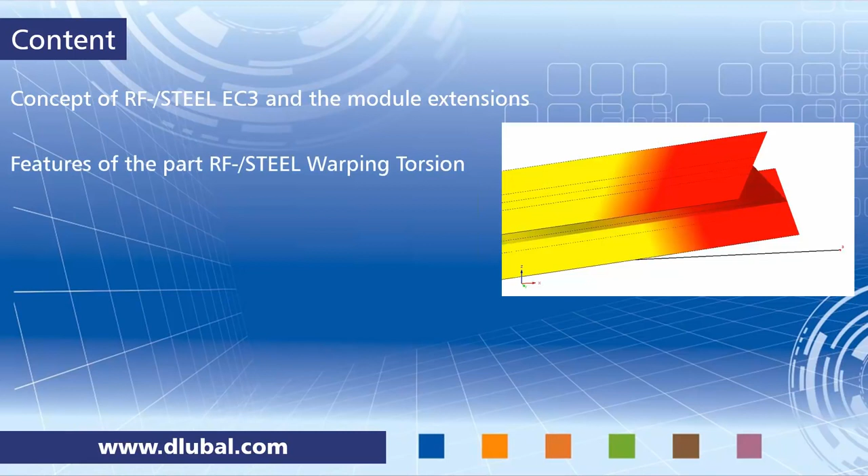We get started with the concept of the RF-STEEL EC3 module and its module extensions. I will then summarize a few features of the RF-STEEL Warping Torsion add-on module and the RF-STEEL Plasticity module. Then it's time for me to hand over the screen to Wieland, and he will show you an example in RSTAB, and he will perform stability design checks using the second-order analysis and employing 7 degrees of freedom. He will also perform a plastic design in RF-STEEL Plasticity.

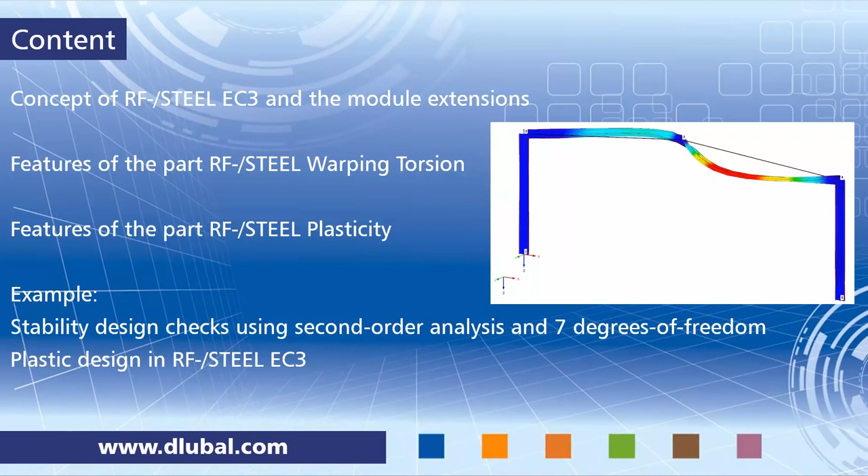Okay, let's get started with the concept. We have the add-on module RF-STEEL Eurocode 3, RF-STEEL EC3. Here you can design in accordance with Eurocode 3. You can perform stability design checks. You can do deformation analysis, and of course you can also do some fire protection analysis.

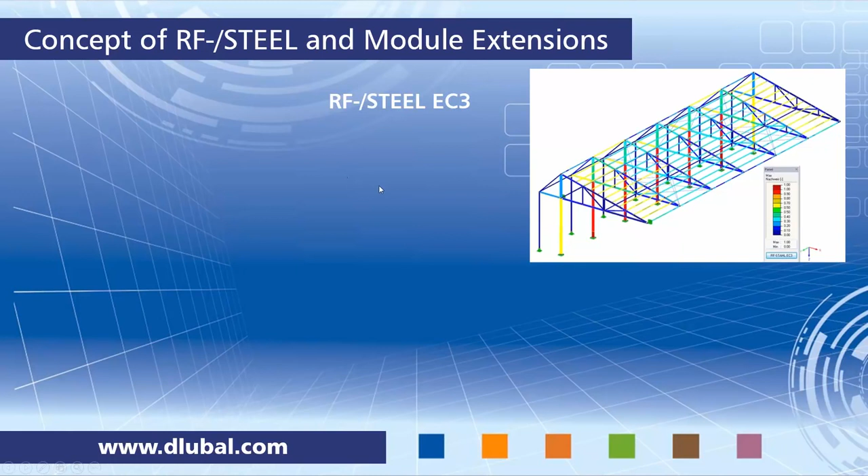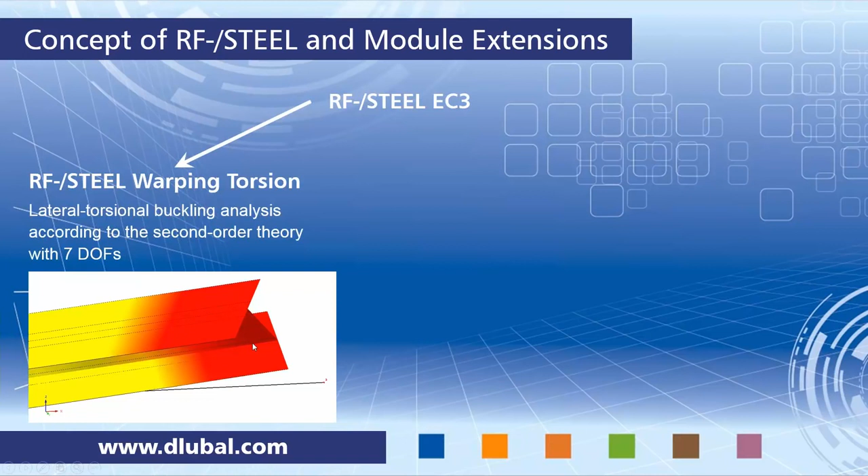And together with this add-on module, you can enable 2 different extensions, and one is RF-STEEL Warping Torsion. Here you perform a design with the second-order analysis under consideration of a 7th degree of freedom. That's warping torsion. And a second extension is RF-STEEL Plasticity. Here you can perform a plastic design of cross-sections. They both work either independently or you can use them in combination. And Wieland will show you this throughout the example.

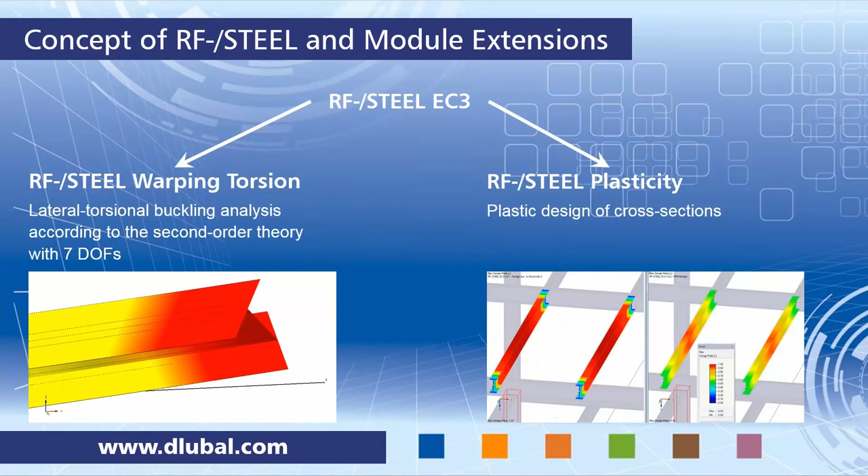To give you a bit more detail, here's a list of features of the Warping Torsion extension. So you have a standalone solver, and this is considering 7 degrees of freedom. So the 7th degree is the warping torsion degree of freedom, beside the usual translational and rotational degrees of freedom. And it is performing a nonlinear analysis in accordance with second order. You can enter imperfections, and in general this extension is available for thin-walled steel cross-sections.

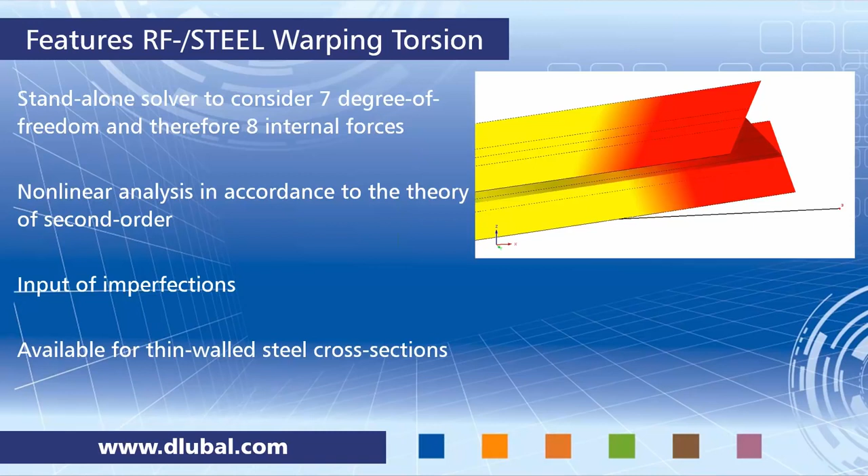In RF-STEEL Plasticity, we have different methods of analysis available. The main one is the partial internal forces method by Kindmann and Frickel, and this method is suitable for nearly all types of cross-sections. This method exists with and without a redistribution of internal forces, and a second method that is available is the simplex method. This is for general cross-sections, and another type is the analytical nonlinear optimization procedure, which is used for elliptical cross-sections.

So it's now time already to hand the screen over to Wieland. He will show you all the discussed things live in RSTAB. And just a side note, everything that is shown and discussed today is available in RSTAB and RFEM. So the add-on modules shown today are available for both program families. So now I hand the screen over and enjoy the webinar.

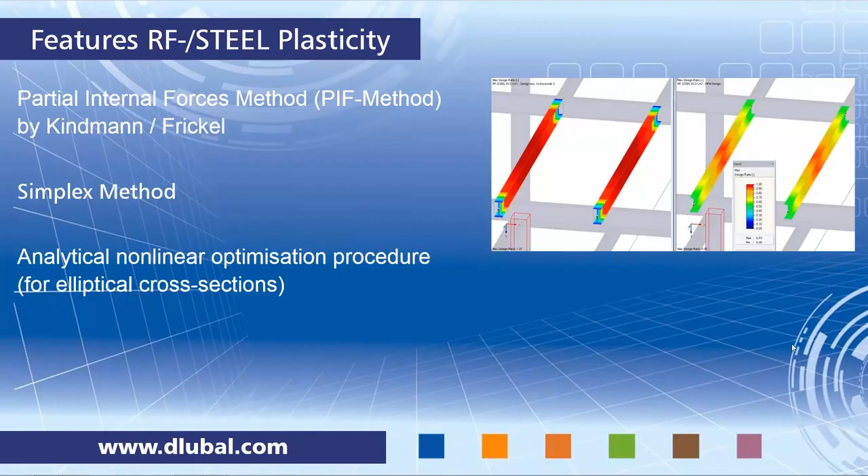Now it's time for the live presentation of this webinar, and I have already prepared the model to start with the STEEL EC3 design. So you can see we have a very simple frame with a vertical and horizontal loading, just one load case. And I want to take a look at the horizontal beams, which we want to design as a set of members. So there's not just one single beam, it is divided by one node, so I had to prepare a set of members to use it as one element in the STEEL EC3 design.

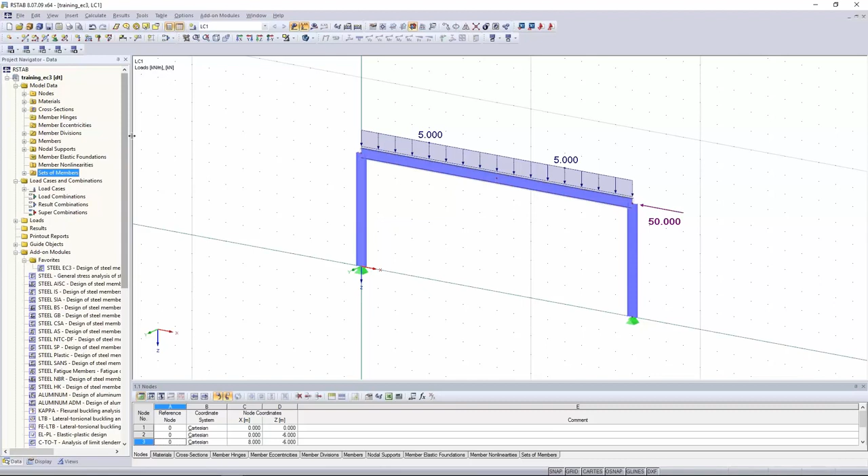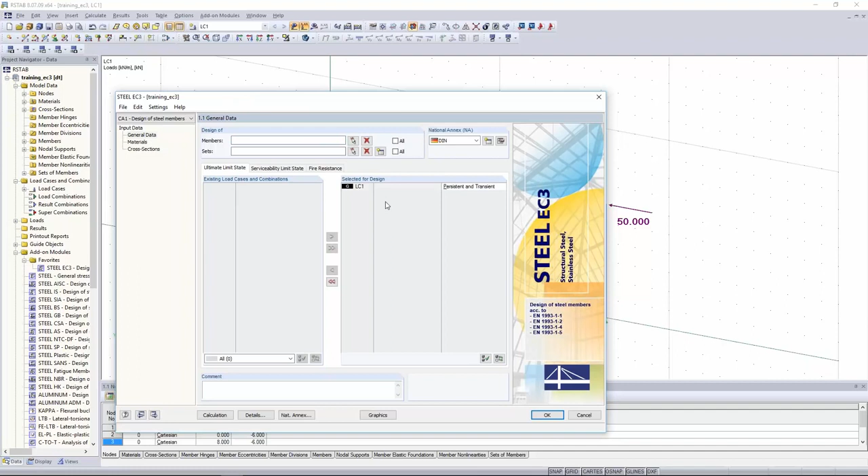Because some of you might see this module EC3 for the first time, we're going to start with just a basic design according to Eurocode 3, and then we want to do an upgrade to warping torsion and plasticity later in this presentation. Yeah, so I've opened the module STEEL EC3. I have to select the load case which I want to design, which is the only one, LC1. I want to check my set of members, and today we want to design according to the Eurocode 3.

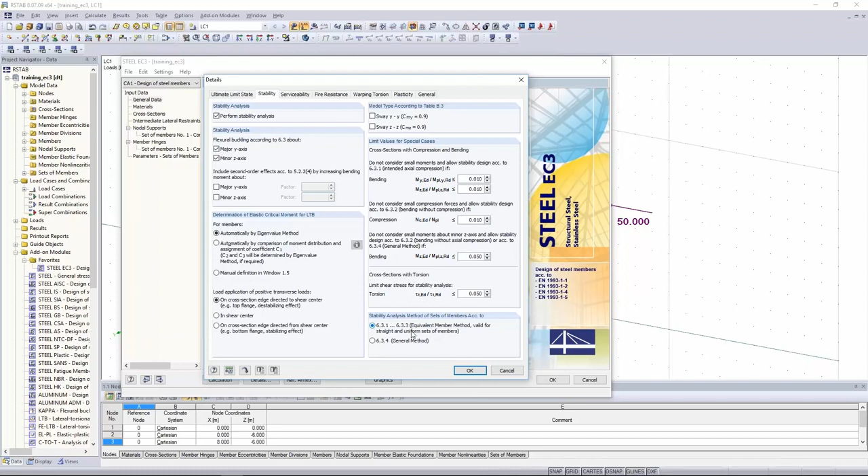In the first part of this design, I want to check this set of members not according to the general method. I want to design it according to the equivalent member method, which I can change in the stability dialog of details. Then I can continue to the next mask to check the material again, which is S235. This is fine. Cross-section is IPE 500.

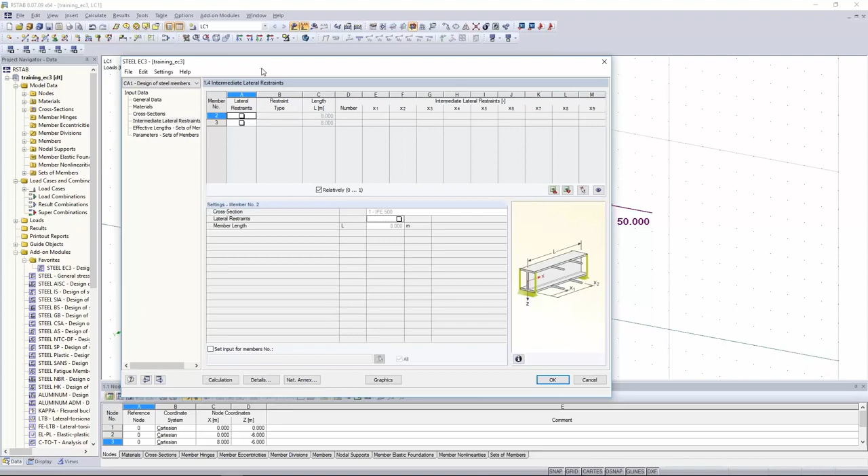I have no intermediate restraints on this horizontal beam, so I can skip this mask. Otherwise, you can prepare intermediate supports along this beam as you wish.

In the next mask, which is effective lengths, you can define all the settings for buckling about y-axis, buckling about z-axis, and lateral torsional buckling in these columns. We want to keep it simple and design it as a simple fork-supported set of members. So all of these settings are already fine. We have buckling length factors of 1.0 in both directions, and the beam is simply fork supported.

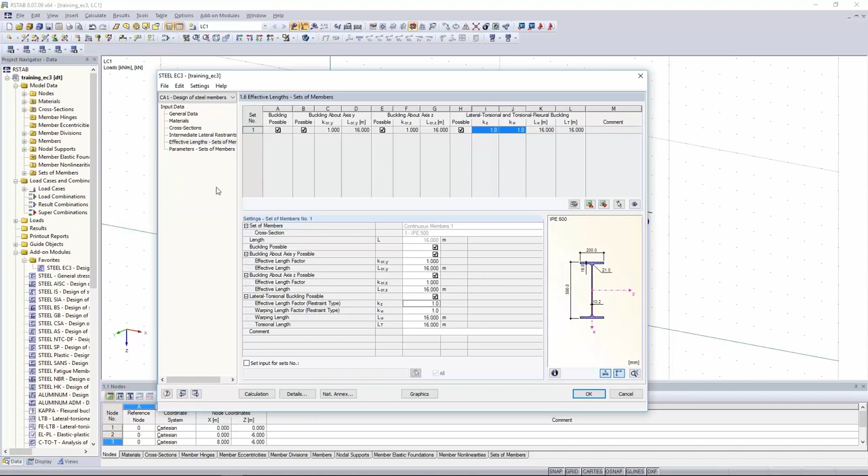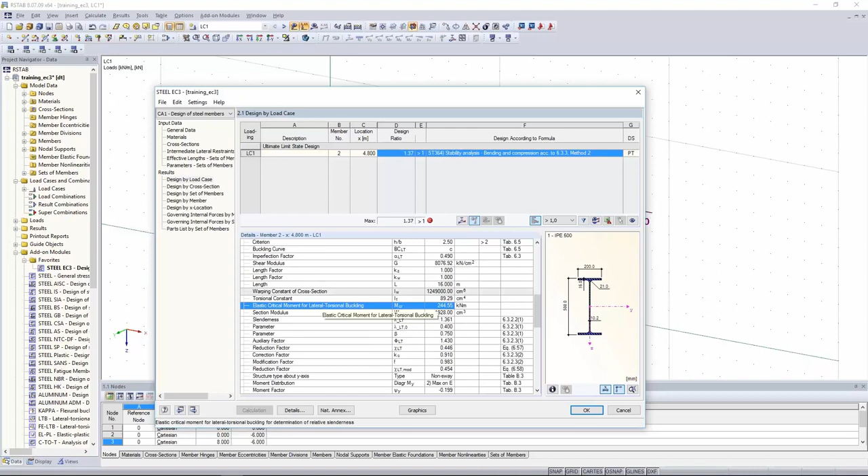So now I can just run the calculation, and you will see we have an overloaded horizontal beam, horizontal set of members here. We have a cross-section class 3, and you can check all the partial results in the design table on the bottom. So you have a part of the cross-section classification. You can see the critical buckling loads over there, and you can check almost every intermediate result in this table. You can export it, and also you can take a look in the graphic to check the results.

So there we have a class 3 section. I think this is at the x place where there's no bending moment. Yes, so we have only compression force, and that's why the IPE section is classified as class 3.

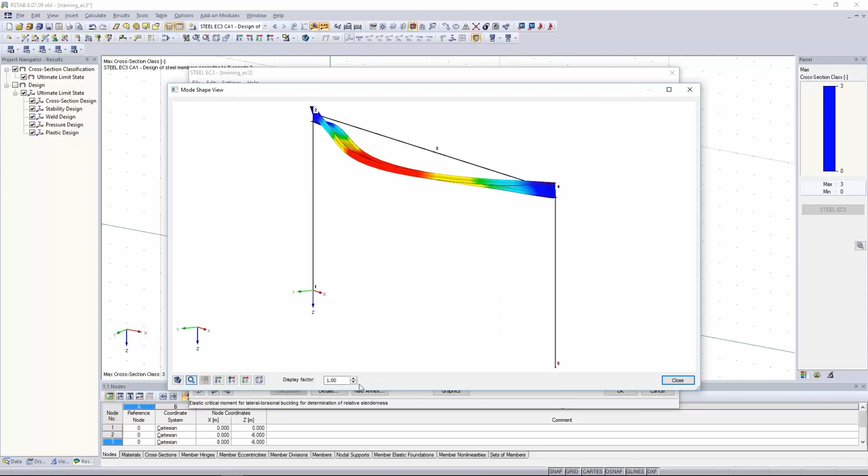Let's get back to the design module. If you want to check the eigenvalue solver, which is inside this module, to get the critical bending moment, M critical, you can click this button here, mode shapes, and you can see that there we have a lateral torsional buckling eigenvalue or eigenmode.

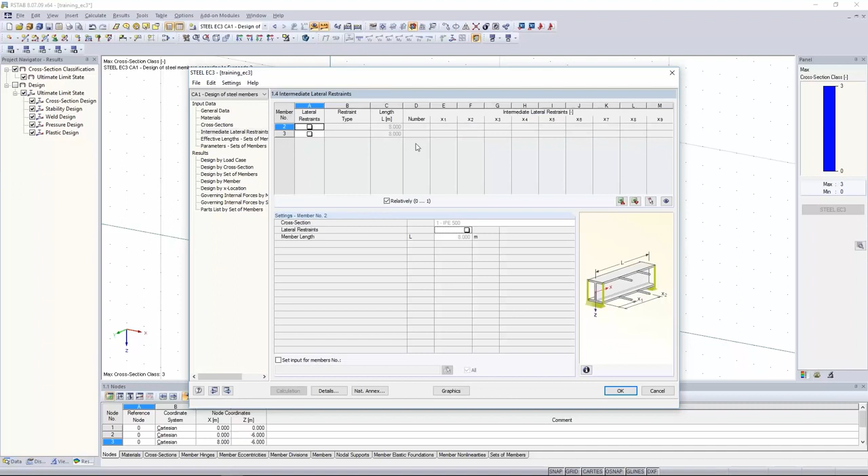And now the question is, how can I design this structure, or how can I stabilize it? And therefore you have several options. As I've said, you can place intermediate restraints as you wish, or in this example I want to show you the rotational restraint or the shear panel. For this example, I will take the rotational restraint, and therefore you can change to the component description over there.

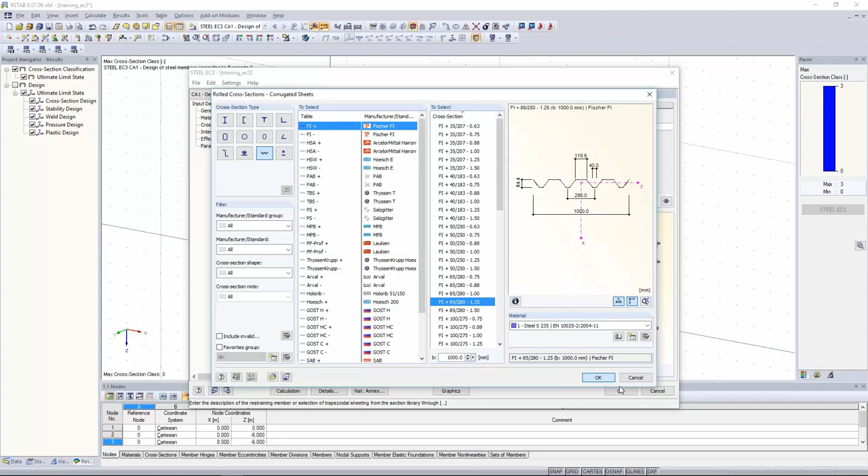And we want to take a trapezoidal sheet into account, which I can easily pick from the database. Let's say this is a Fischer trapezoidal sheet, 85/280, 1.25 thickness. That's fine. And the module will take into account all these values automatically. You just have to define a beam spacing, and maybe you want to change the C100 value according to Eurocode 3 Part 1-3.

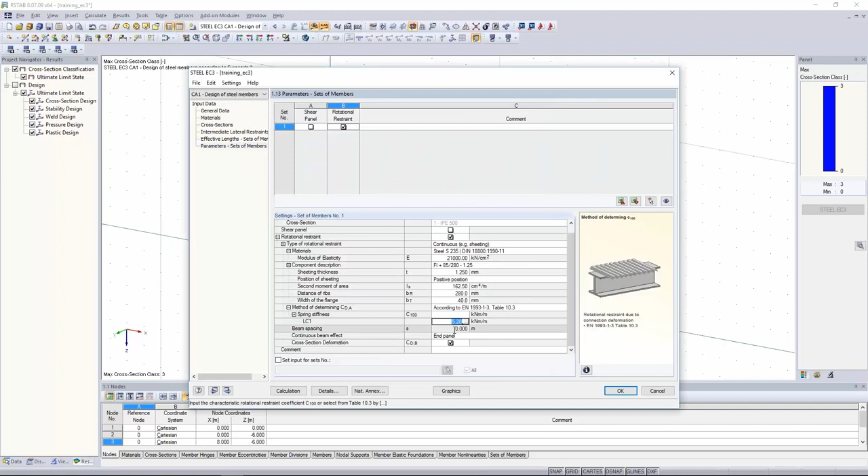I want to have a beam spacing of 5 meters, and then I can run the calculation again, and now you can see that this structure is already stabilized. We have a fulfilled design, and this is fine. You can also check the partial results of the rotational restraint over there, up to the total rotational spring stiffness.

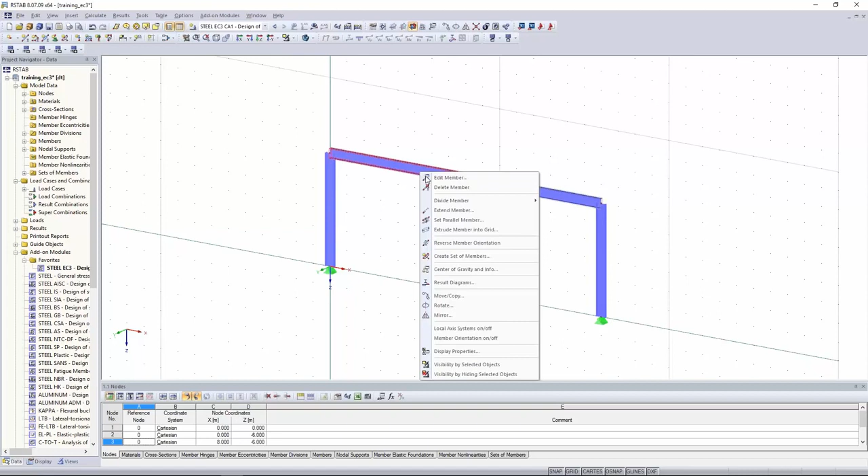All right. In the next step, I want to do a small change in the structure because I need some more spacing on the connection of the beam to the column. I want to prepare a taper at the beginning and at the end of the beam. Therefore, I just right-click on the member, edit member, right-click, divide member by distance, and I can easily change this value to 1 meter and this one to the same, divide member by distance at the end, 1 meter.

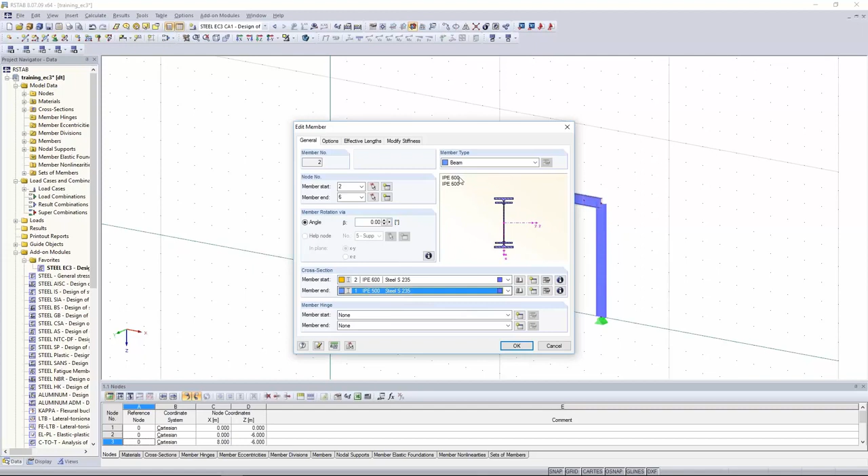To define the taper, I can just change the cross-section at the beginning, IPE 600 now, and IPE 500 at the end, and the program will automatically define the taper over there. Same thing on the right side, not at the column, on the beam. IPE 600 section at the end of the beam. Now I want to run the design again.

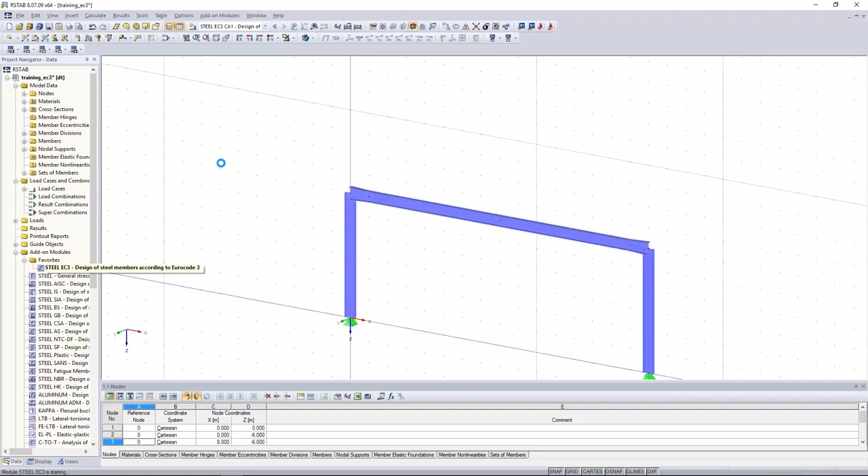The question is, in the first design we had a design according to the equivalent member method. We had bending and compression, and this is according to chapter 6.3.3 of Eurocode 3. And this chapter is only valid for uniform members. Now we have a tapered member, and we have to change this because it's not valid anymore. If you have a taper, you can use the general method.

Click on OK, and you will see for the set of members, it changed automatically to nodal supports. And this is a different method from the last one. It's not the equivalent member method. General method means you have a design according to chapter 6.3.4 of Eurocode 3, and therefore we have to place some nodal supports to get the equivalent system for the eigenvalue.

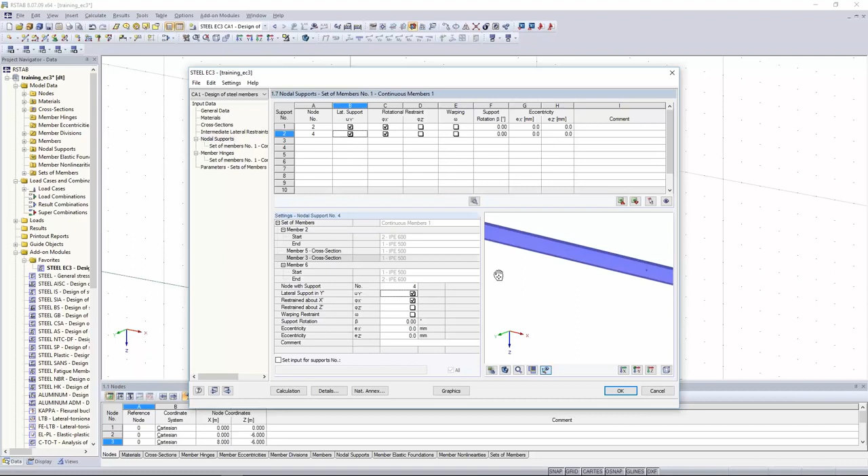You can check these nodal supports graphically in this view. As you can see, we have the whole frame over there, but by clicking on local coordinate system, you can change to view the nodal supports, and you can check them. But in my example, these default nodal supports are already fine, and I can just design this set of members

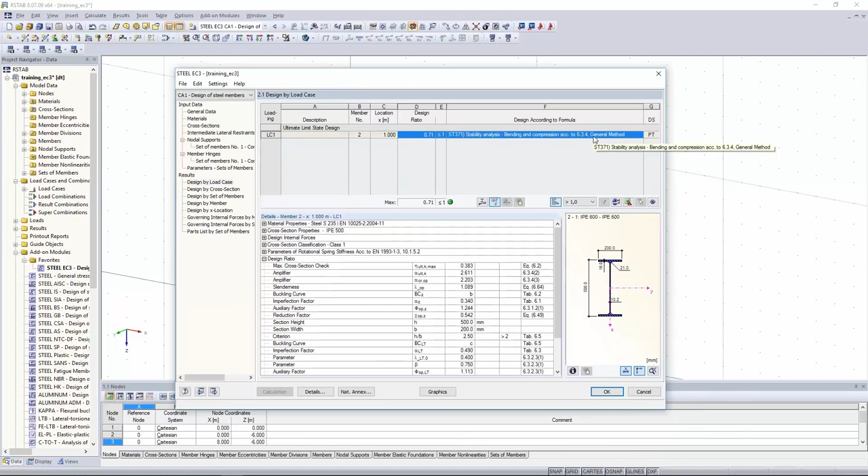by clicking on calculate. So also for the tapered member, we have a design according to the 6.3.4 general method, which looks a bit different, but as you can see, there's a small issue with the graphic there, but this is also possible to have a design for tapered sets of members.

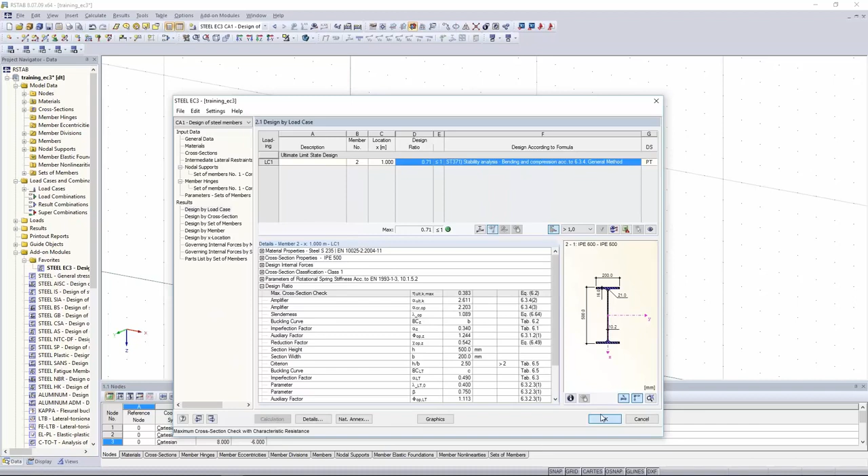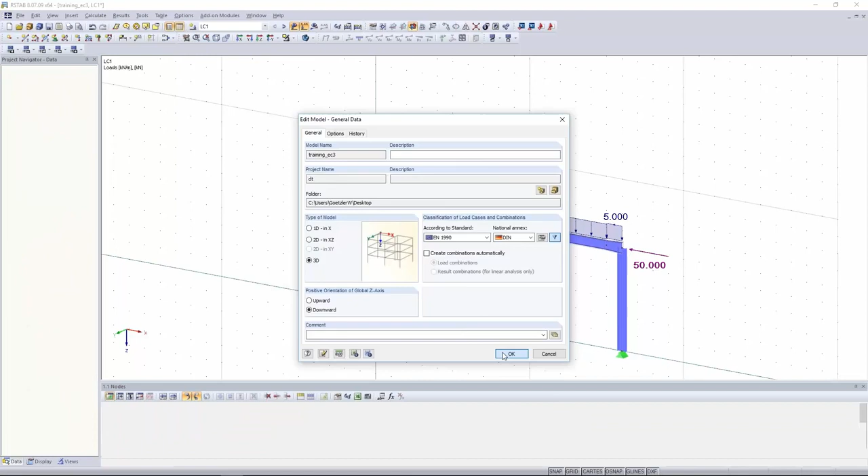Now we have to follow a more specific problem of the structure. We want not just to define the transverse loading and the horizontal loading, we also want to take some cross-bending into account, and therefore I right-click on General Data, change the structure to 3D, and have to define some nodal supports to support the frame out of plane.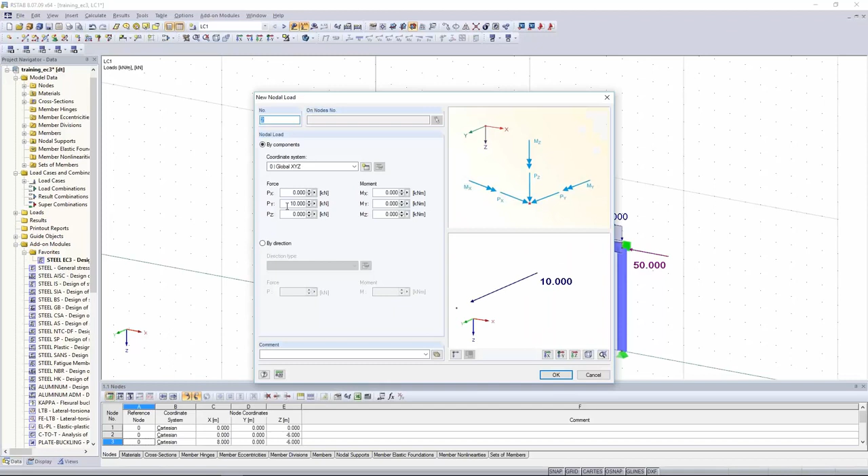And therefore I can just define the loading out of plane, which is 10 kilonewton in this example, in the center of this horizontal beam, which is quite a bad loading in this position, but we will see how to define it, how to design it.

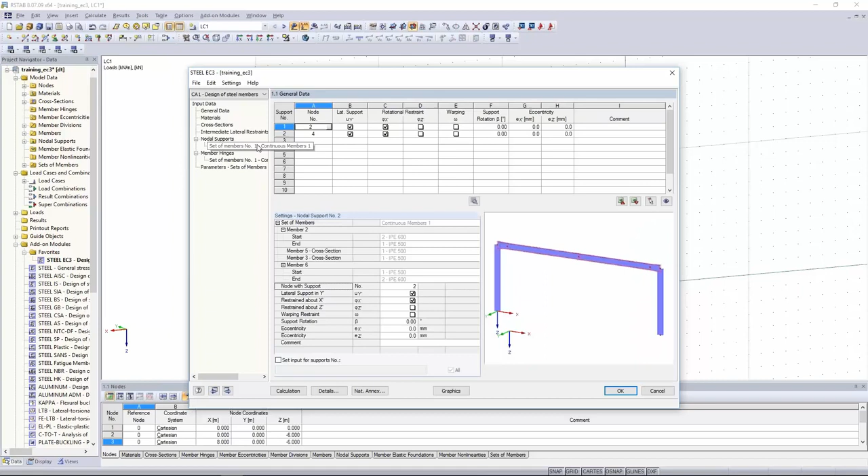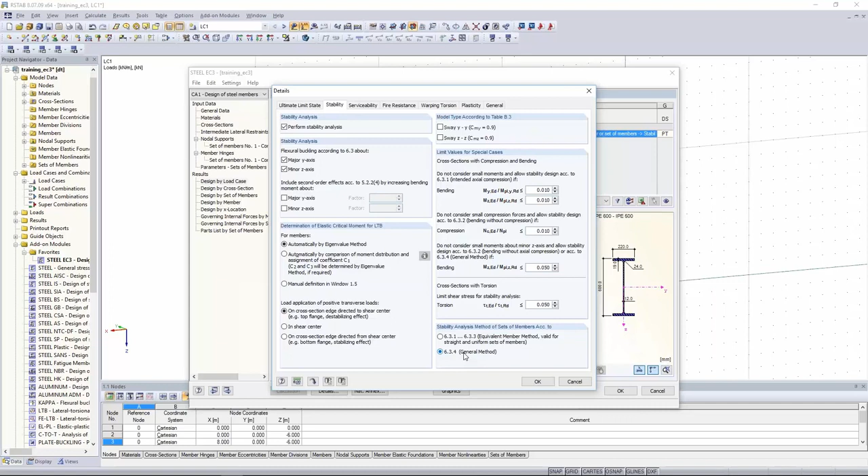First of all, we want to try to do the same analysis again, just by running the calculation again. But there's a warning message coming up, which says that there's a moment about the z-axis, of course, and this is not allowed for this design method. The design according to chapter 6.3.4 allows only a loading in plane, and this bending moment Mz is due to a loading out of plane.

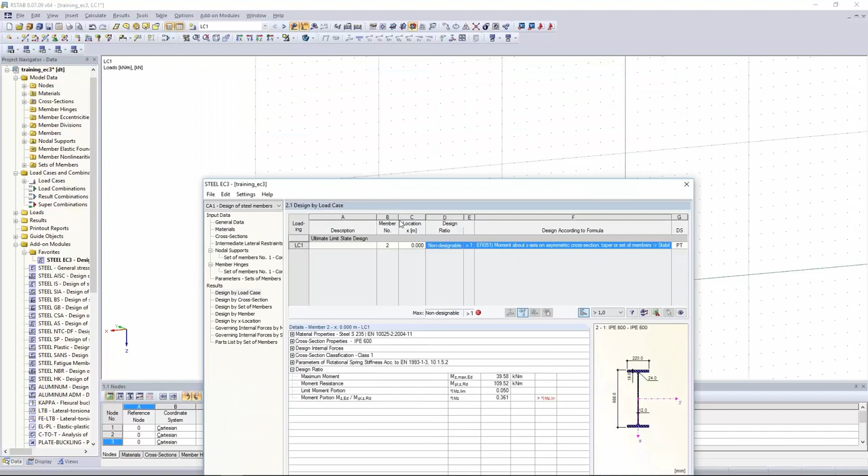And now we come to the problem where you probably need this new module warping torsion, because the question is now how to get this design done for this loading and this model. And there's one really easy solution in Steel EC3 now with this new module warping torsion. You can see over there we have quite a lot of cross-bending with about 36% of the resistance and plastic. So we cannot say, okay, I want to neglect, let's say, 10% of the cross-bending over there. This is not a solution.

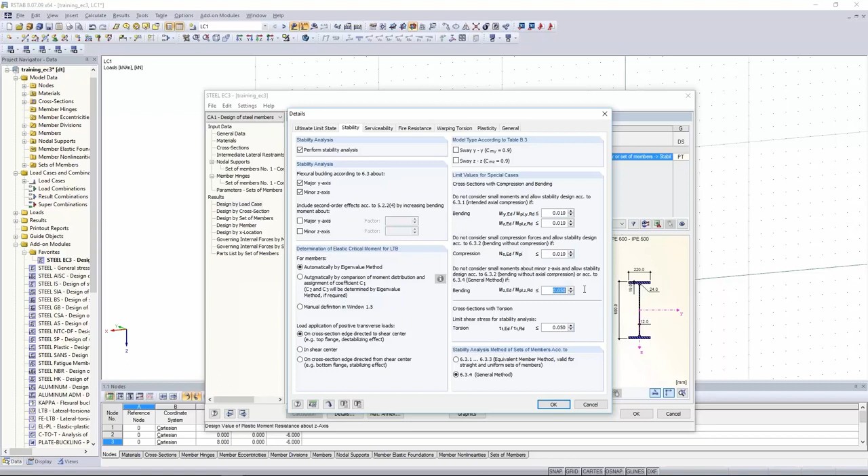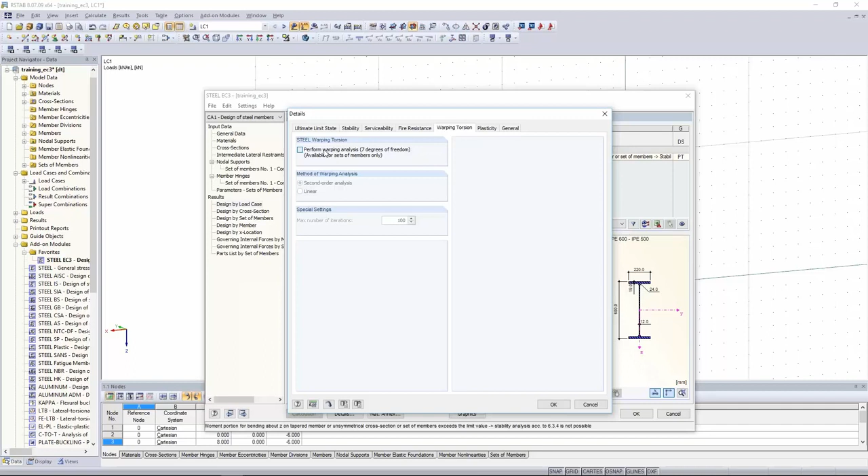The warning message will pop up anyway, and no, we cannot say, okay, I want to neglect the 36%. We have to take it into account, and therefore I will just activate this new module, Steel Warping Torsion. In details, warping torsion, you can do this one. Over there, just activate the checkbox. Okay.

Now we can switch to the nodal supports again. And it's basically the same as in general method, but you can see that now we have not just 4 columns with 4 degrees of freedom for out-of-plane stability problems. We have all 7 degrees of freedom. That means all the deformations, all the 3 rotations, and the 7th degree of freedom, the warping. We have to check the boundary conditions again, which is fine in this example, I think. Let me just remove the

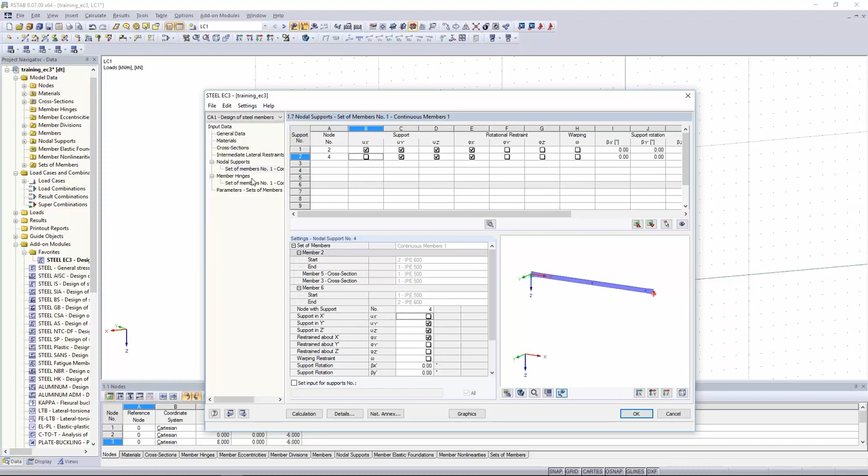deformation in local x-axis. And now what we want to do with this module is we want to perform a stability design not with the equivalent member method or with reduction factors χz, χLT, and so on. We want to do a second order stress design, and there's a last question coming up now, and this is how to define the imperfection. Because for a second order analysis you need to define this one, and this is done by applying this initial bow imperfection according to the first eigenvalue or eigenmode of the structure.

Let's say in this example we want to do the design according to L/250 of the length of this eigenshape. And this is the value you will find in the national annex of the Eurocode. So in Germany, for example, there's a table where you can find this value which says, okay, you have h/b of the section bigger or smaller than 2, and you will find exactly this L/200, L/150, and so on in the table.

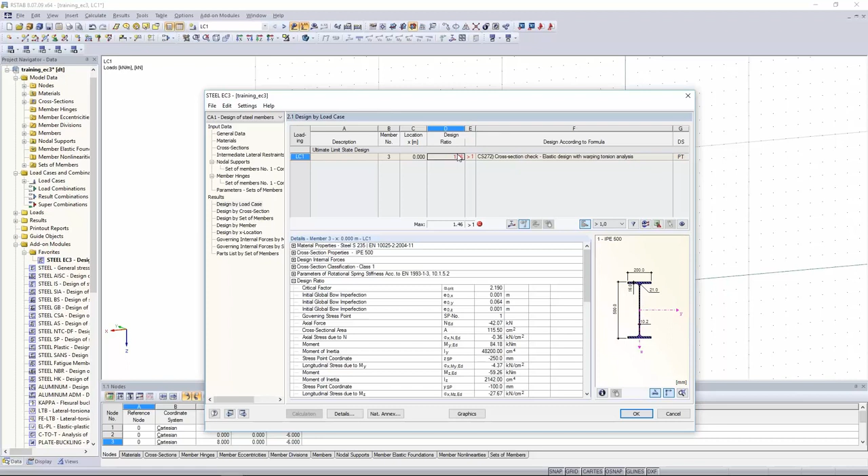And after we've defined this initial bow imperfection, we can simply run the design again, and now you can see there's no warning message coming up, but it's, let's say, slightly overloaded by over 50%. Now we are at around 146%. And in the bottom you can see we have the rotational spring stiffness taken into account. We have section class 1 now, and there's a critical load factor of 2, which seems fine.

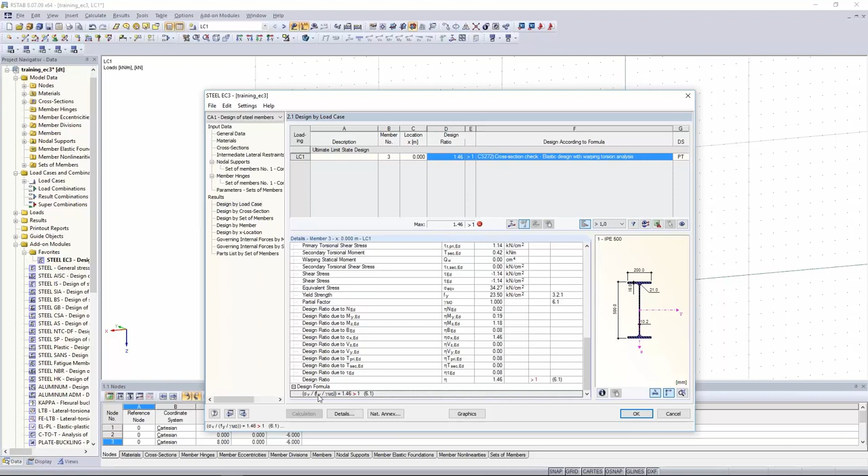The checking of the initial bow imperfection, and in the bottom of this table there's all the stress design. You can see all the partial ratios due to normal force, due to bending moment, and so on, until you get the full design formula according to equivalent stress. You can check it also in the graphic. This is the section classification, which is fine, but now we have just elastic stress design, so it doesn't matter if you have a section class 1 or 3.

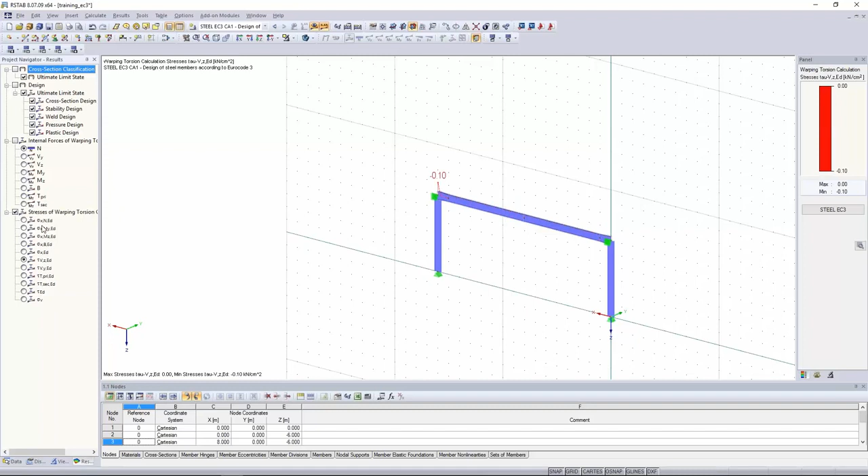You can check the internal forces of this new calculation up to the bending moment and so on. And you can check all the stresses from normal stresses to equivalent stress in this tree on the left side.

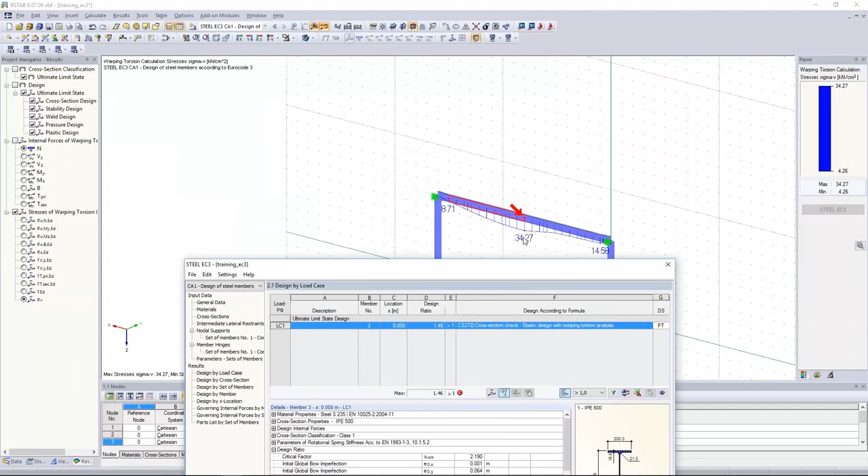So what this module is giving you is the opportunity to check all the critical cases in EC3 which you cannot design before. That means, as you can see, we have a bending around the weak axis on the tapered section, which is not possible to design according to equivalent member method. You can have a general cross-section, maybe from our cross-section program SHAPE-THIN, which you cannot design before that. All these cases which might lead to a warning hint, undesignable, these are possible to design now with warping torsion.

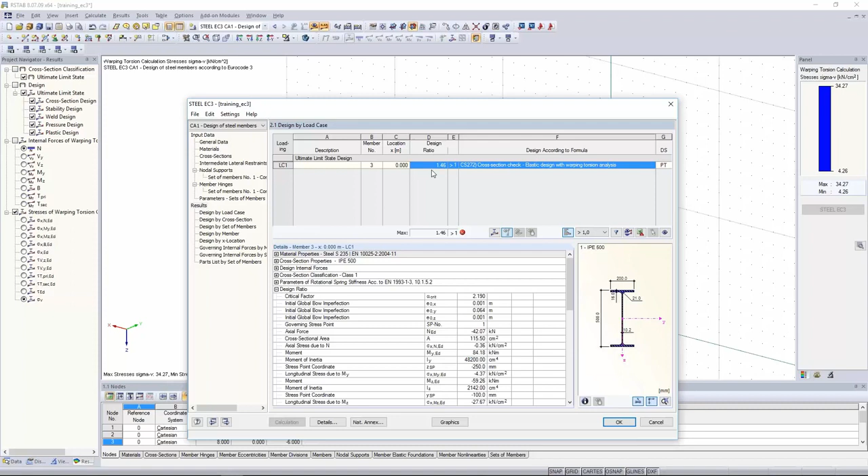To give you a better chance to get a better design, there's another upgrade called steel plasticity. This might help you to improve this design over there. Now we have about 150% loading, and we want to check if there's a possibility to get this design fulfilled somehow. And as I've said, we have this class 1 section, which is fine, but we only have an elastic stress design in warping torsion. So what we want to take into account is the plastic resistance of the cross-section, and this is what we can do with the module steel plasticity.

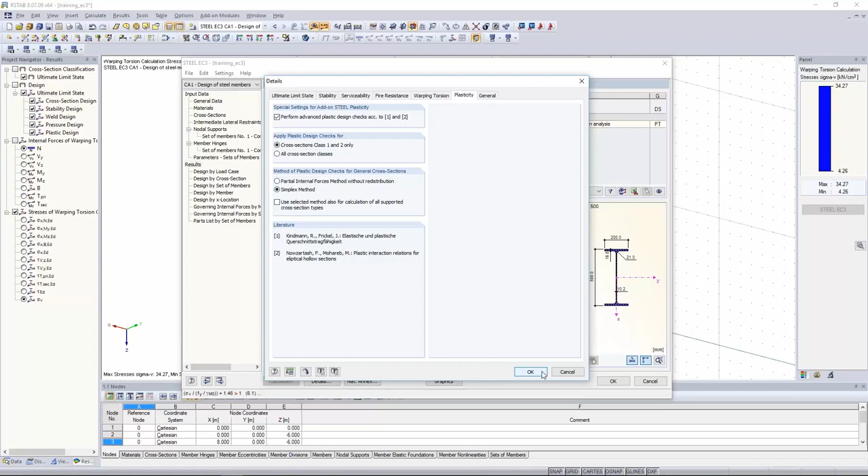So I want to activate this additional part of EC3 module over there, and you can decide if you want to do a check for all the cross-section classes or only for class 1 and 2. And you can check also general sections like SHAPE-THIN sections, C, Z sections, whatever. You can choose the simplex method for these sections. Okay, and you don't have to do anything else because in details warping torsion is still active, so we will use the warping torsion internal forces to get the design done with the plastic resistance of the cross-section according to partial internal force method.

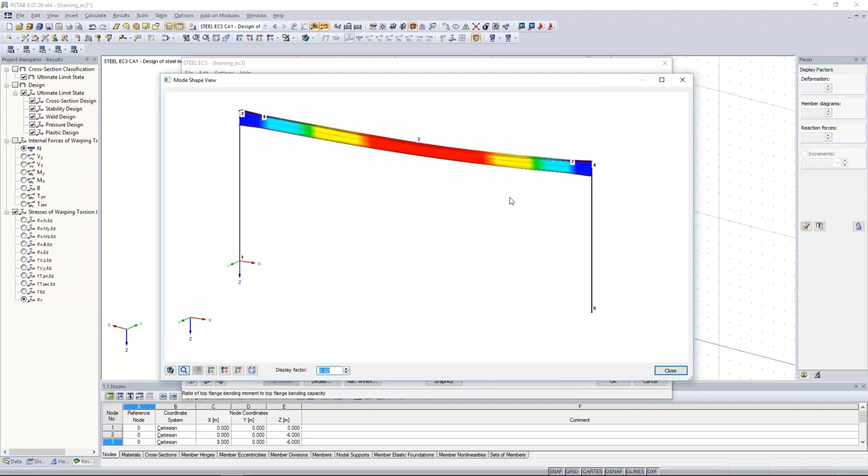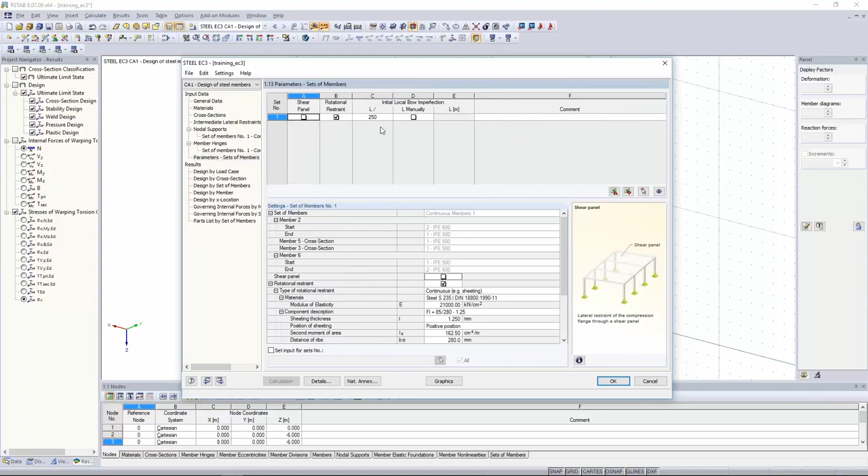And just by clicking on calculation, you can see that this design is now fulfilled. We have a plastic resistance of the section, and with the partial internal force method, it was possible to get this design done. And this is quite a nice feature. Now also the eigenshape graphic is working again, and of course we still have a lateral torsional buckling eigenshape, but now it was possible to get this design done with the aid of warping torsion to get the second order internal forces with the aid of imperfections and with the module extension plasticity.

So let me just summarize a bit. The EC3 module gives you a lot of opportunities to get all the designs done for all the sections which are mentioned in EC3 code and all the loading which is mentioned in EC3 code. That means all the I sections, all hollow sections, and bending around all the axes and normal forces are not a problem in EC3 module.

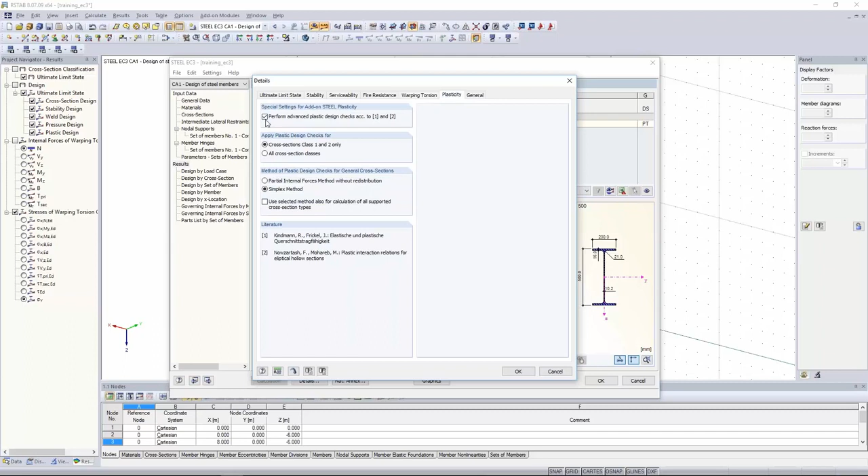If you have a bending moment around the Z-axis, if you have torsion, which is a big topic, if you have unsymmetric sections, SHAPE-THIN sections, all the general sections, and you have a loading with bending and compression, you might need warping torsion, and this gives you a solution to get the steel stability design done all in this module. And to even take the plastic resistance of the cross-section into account for this second order analysis, you can choose also steel plasticity.

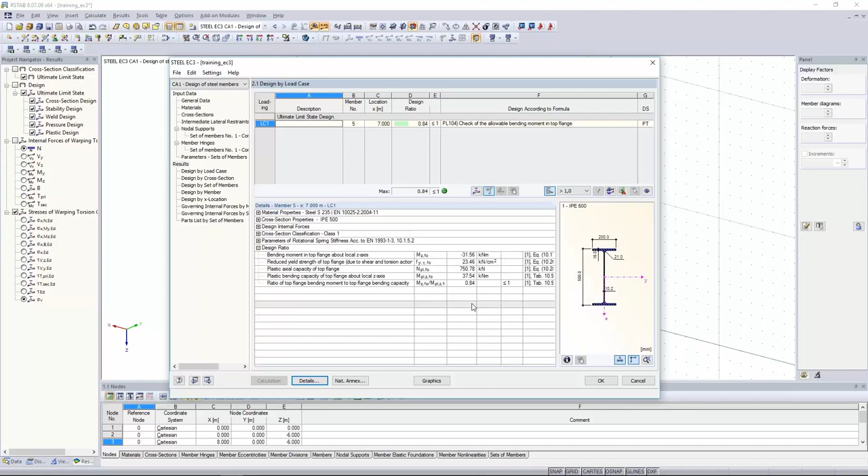Many thanks, Wieland, for the very interesting webinar. You also summarized the advantages very well at the end. With the Warping Torsion extension, you are able to design cross-sections that were non-designable beforehand. And with the Plasticity extension, you are able to use the plastic resistance limits.